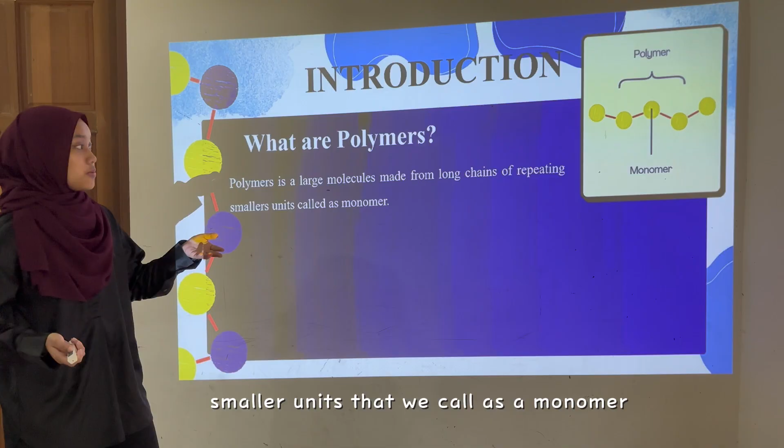So, what are polymers? Polymers is a large molecule that made from long chains of repeating smaller units that we call a monomer. So basically, the most common shape of polymers is made in pellets, which is a small plastic beads.

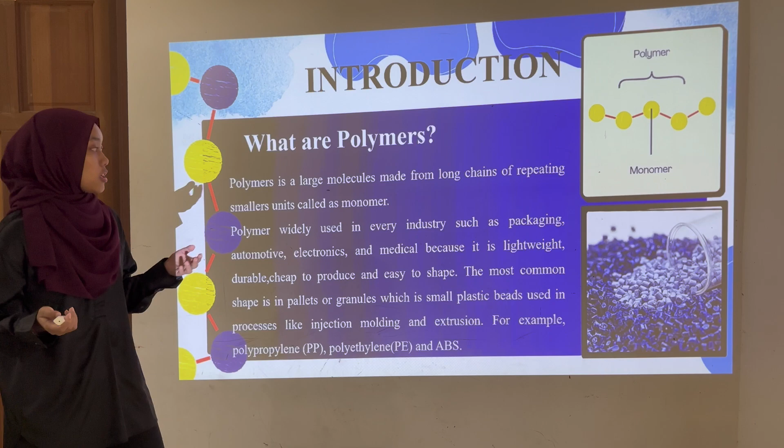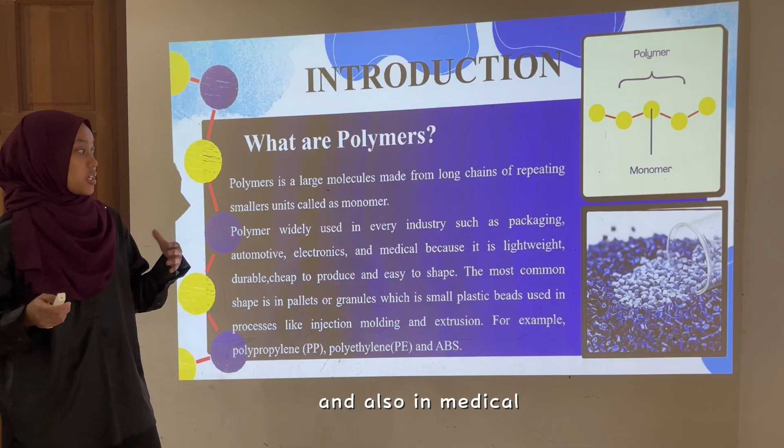Mostly we use these pellets in industry as packaging, also automotive, electronics, and also in medical because it's lightweight and durable, and also easy to shape.

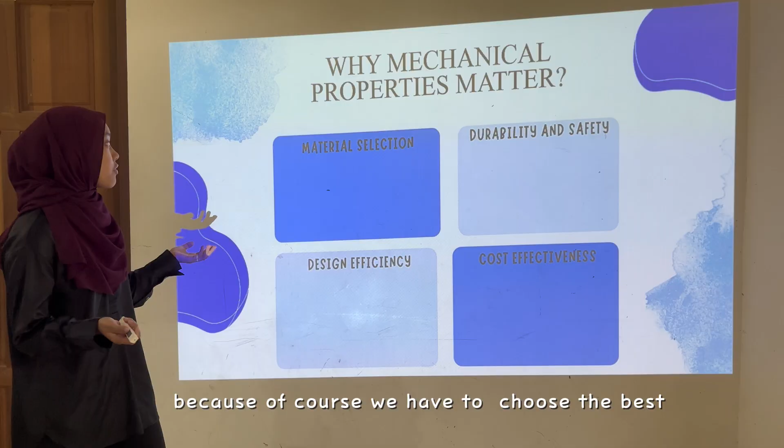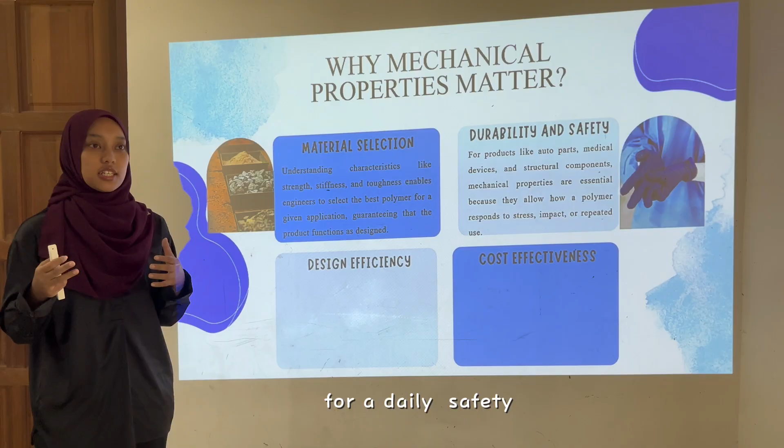So why does mechanical properties matter? Because of course we have to choose the best polymers before we produce our product or design. Next is durability and safety, for example medical devices that you can use repeatedly for daily safely.

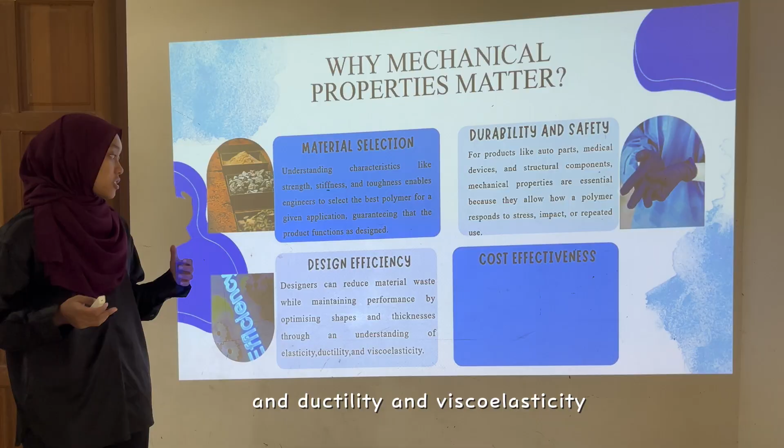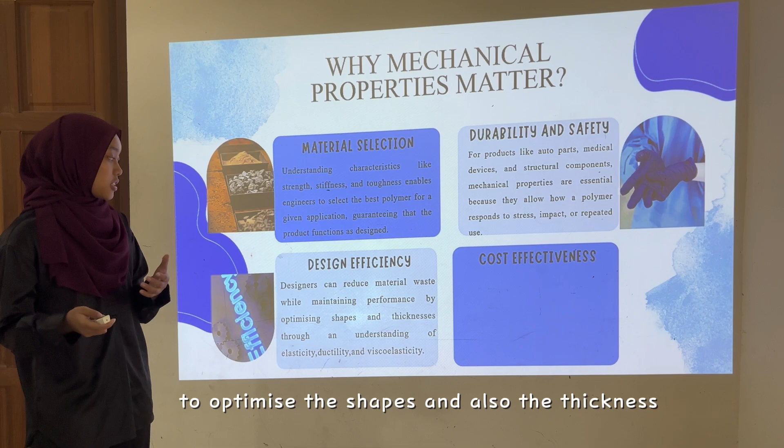Next is the design efficiency. Of course, we have to understand elasticity, ductility, and viscoelasticity before we produce the design, to optimize the shapes and also the thickness. And last is of course to avoid high maintenance, to save our money, to save costs.

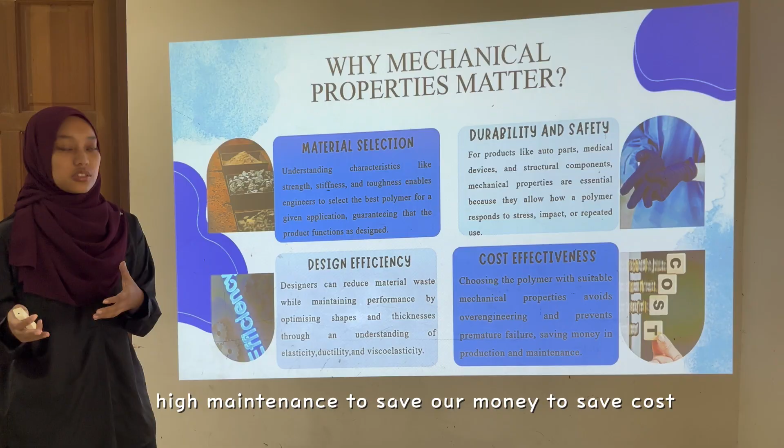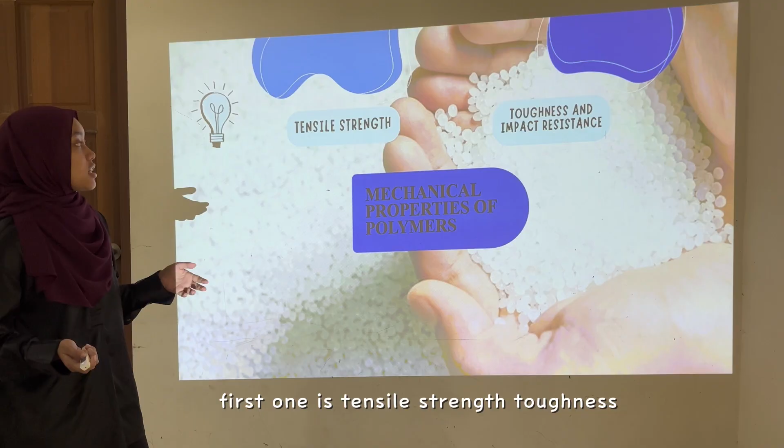So we have a set of mechanical properties of polymers. First one is tensile strength, toughness, impact resistance, elasticity and viscoelasticity, stiffness, hardness, and also creep behavior.

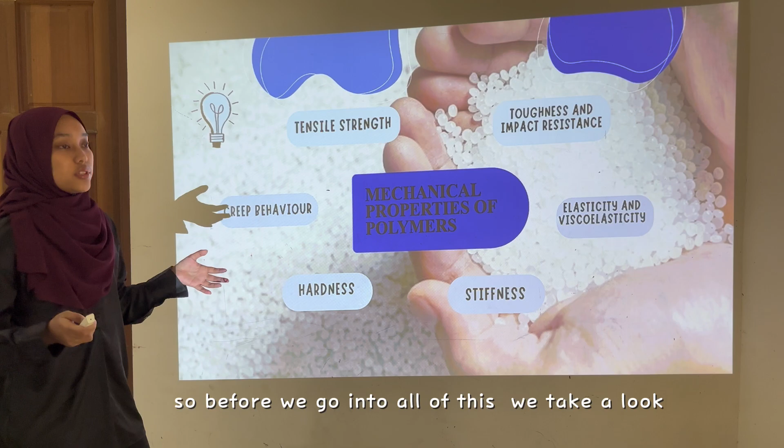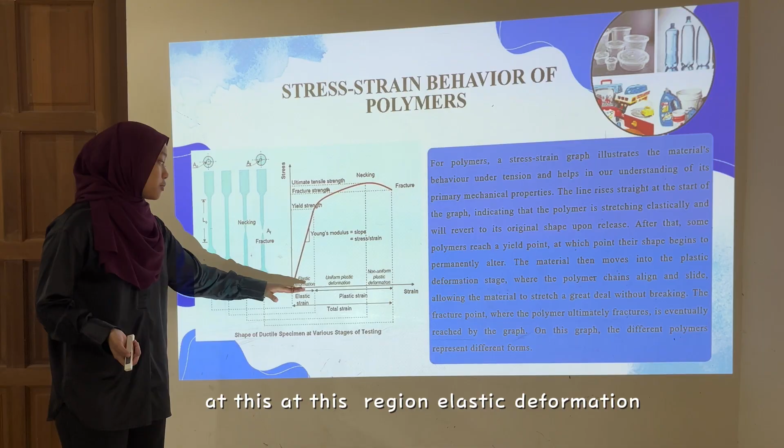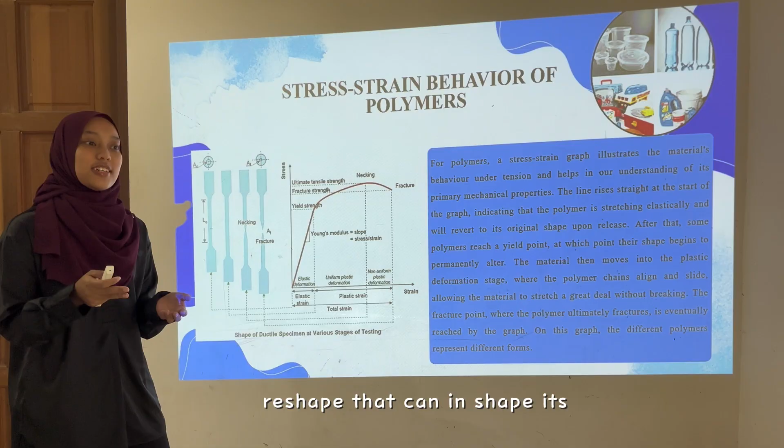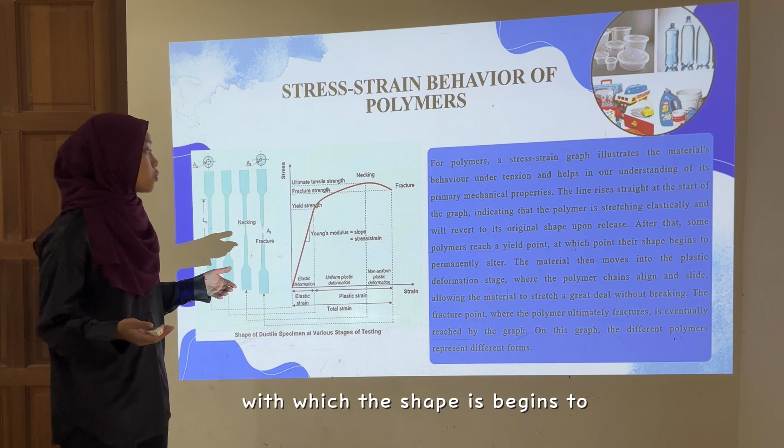So before we go into all of this, we take a look at a graph of stress strain first. In this region, elastic deformation, the polymers can reshape back to its original shape. At this yield point and yield strength, the shape begins to permanently alter, that it cannot be reshaped again, and that we call the plastic deformation region.

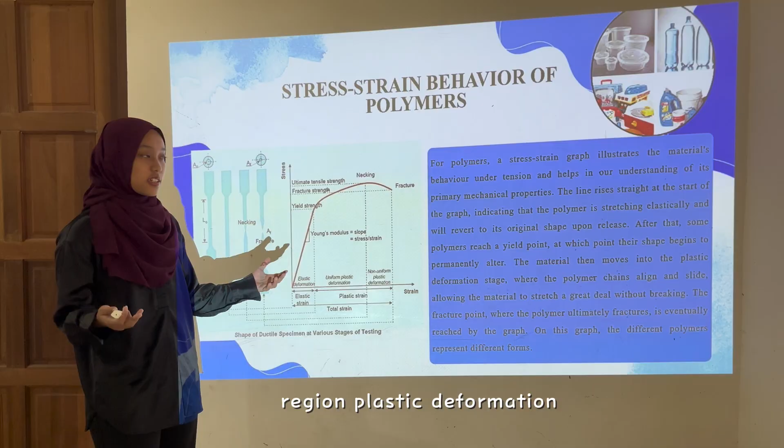And after that, it will break at a fracture point.

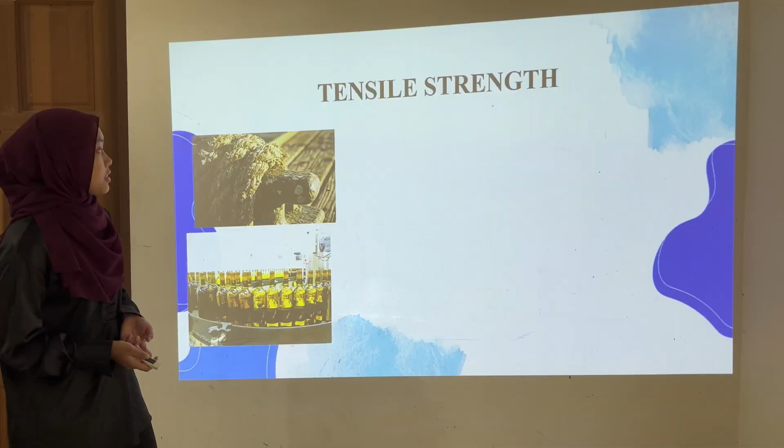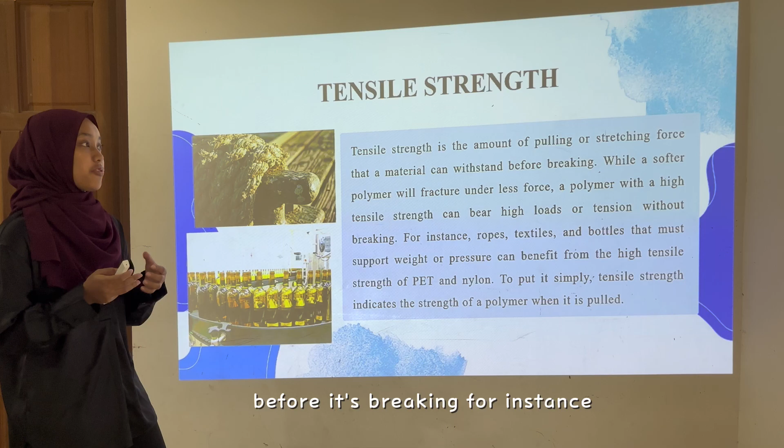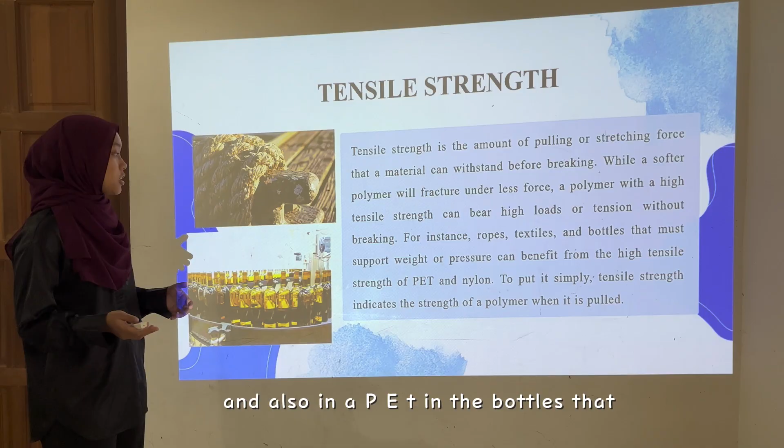So first one is tensile strength. Tensile strength is the maximum force that we're pulling before it's breaking. For instance, the ropes - we use nylon in the ropes to tie a boat. And also PET in the bottles, for how much weight we can support the liquids in the bottles.

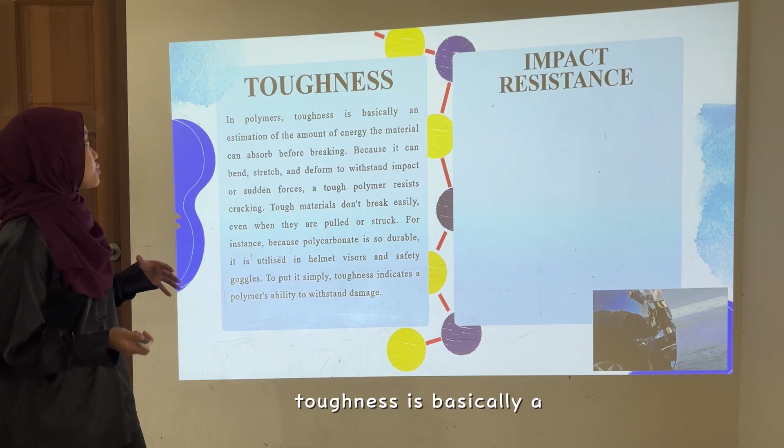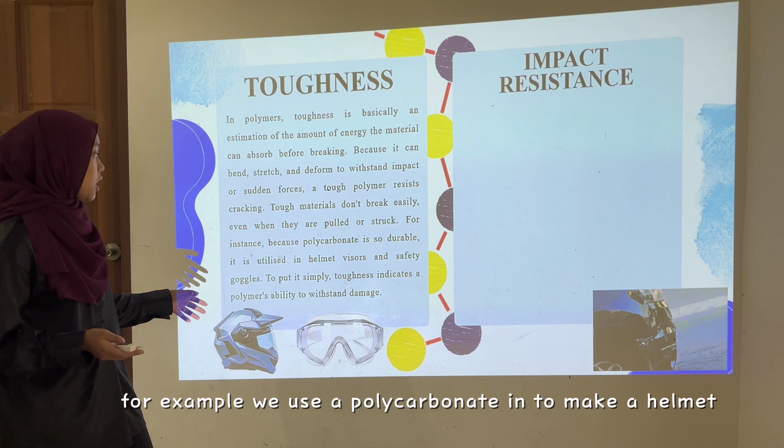Second one is toughness. Toughness is basically how much energy it can absorb before it's breaking. For example, we use polycarbonate to make a helmet visor and also safety goggles, because it's durable.

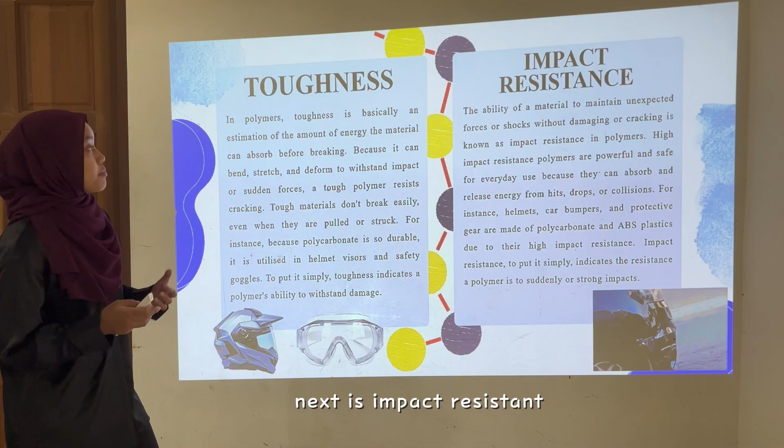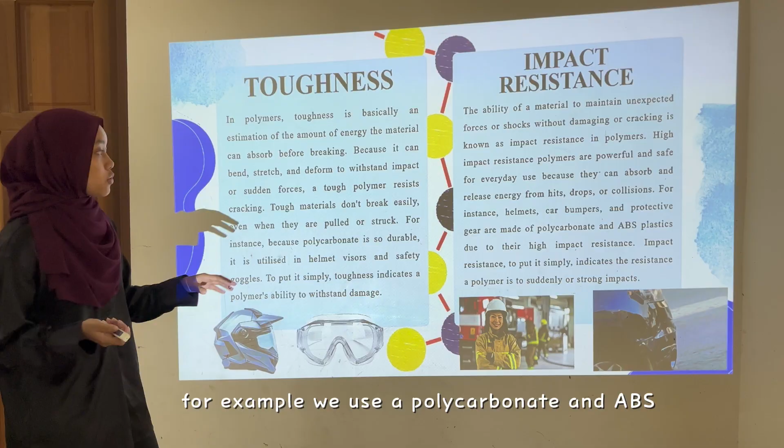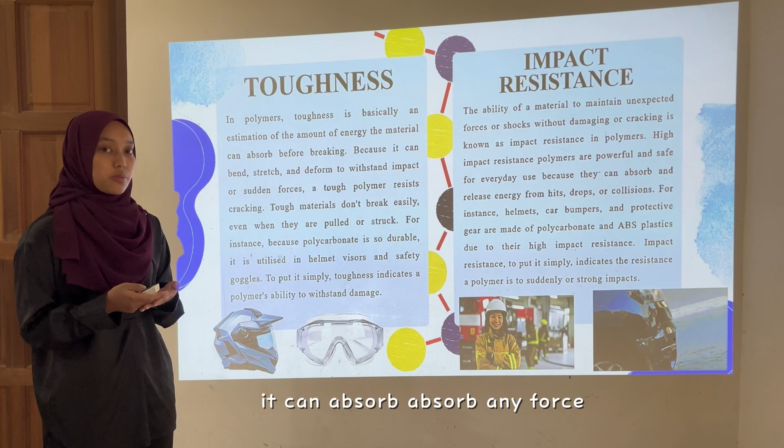Next is impact resistance. Impact resistance is the ability to absorb a force that suddenly falls. For example, we use polycarbonate and ABS plastic to make a helmet and also car bumpers because it can absorb any force and have a strong impact.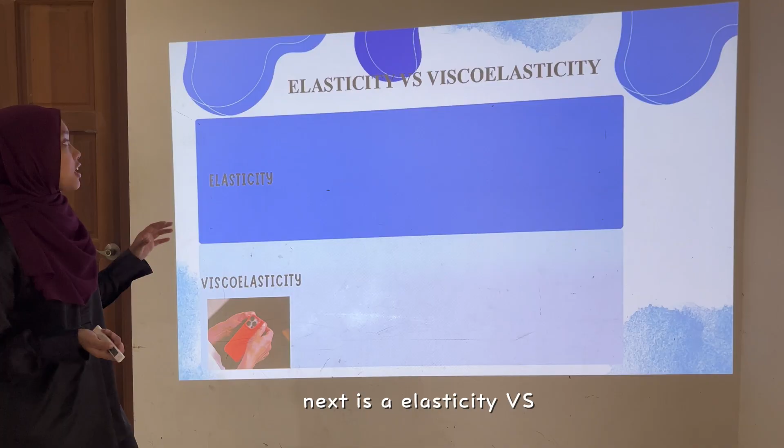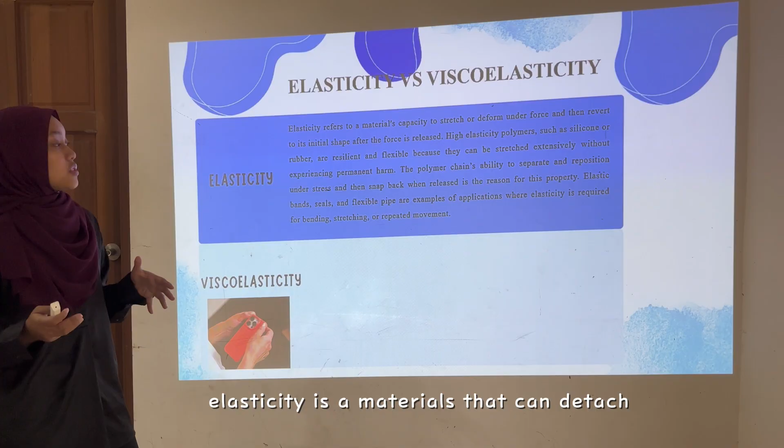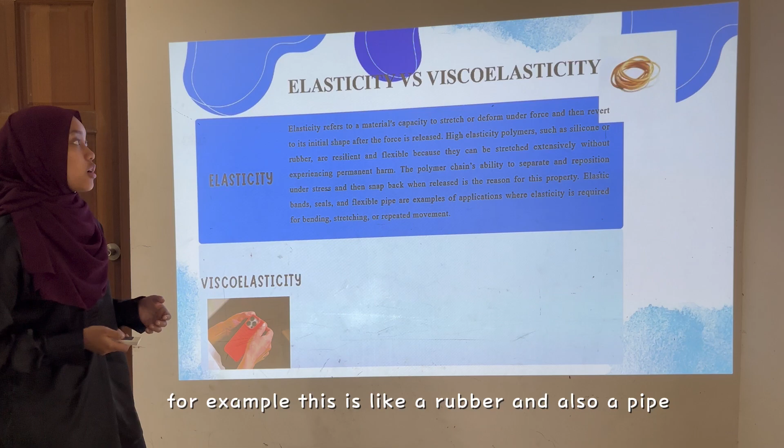Next is elasticity vs viscoelasticity. What is the difference? Elasticity is materials that can stretch or deform under force and revert to its initial shape. For example, this is like rubber and also a pipe.

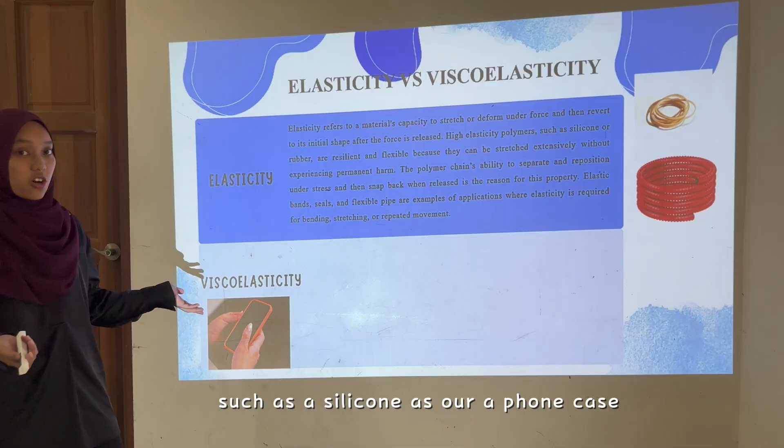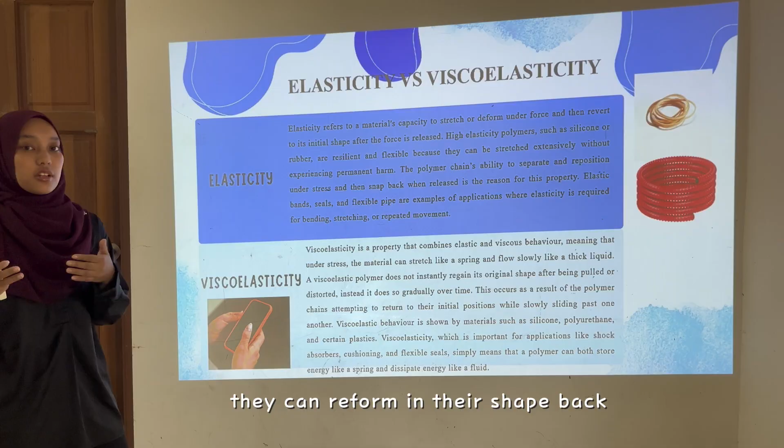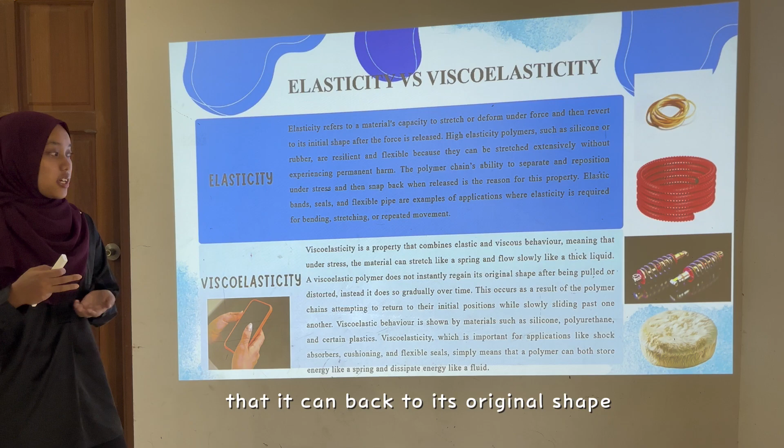So what is viscoelastic? Mostly we use it in our daily life, such as silicone as our phone case. Viscoelasticity means they can reform in their shape back, but it takes time. For example, like a shock absorber and also our cushion mattress, that it can go back to its original shape, but it takes time.

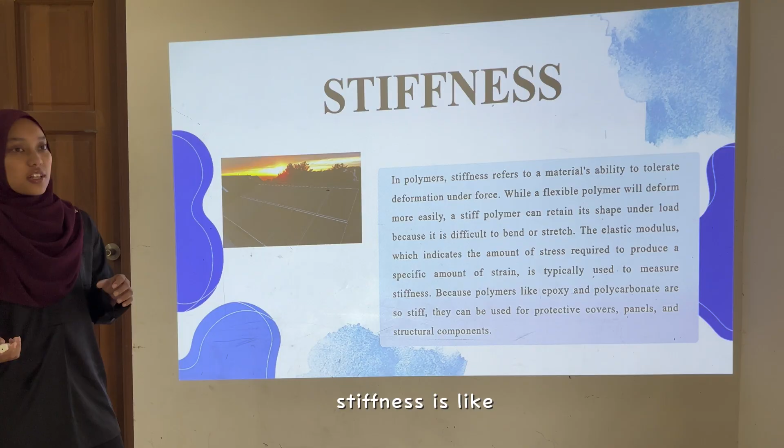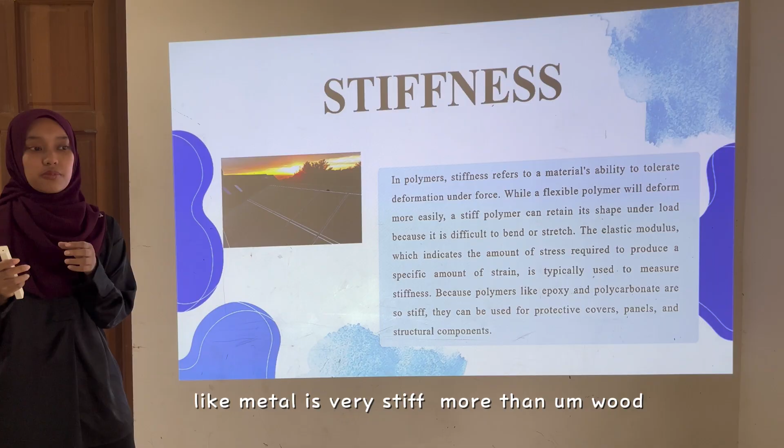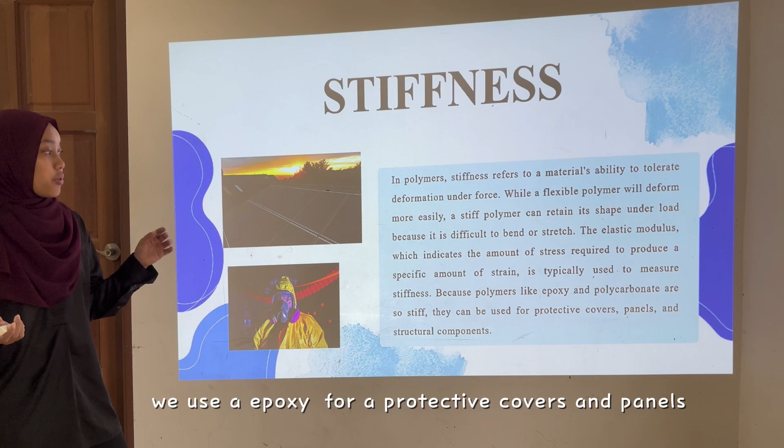Next is stiffness. So what is stiffness? It's like the difference between a metal and wood - metal is very stiff, more than wood. For example, we use epoxy for protective covers and panels.

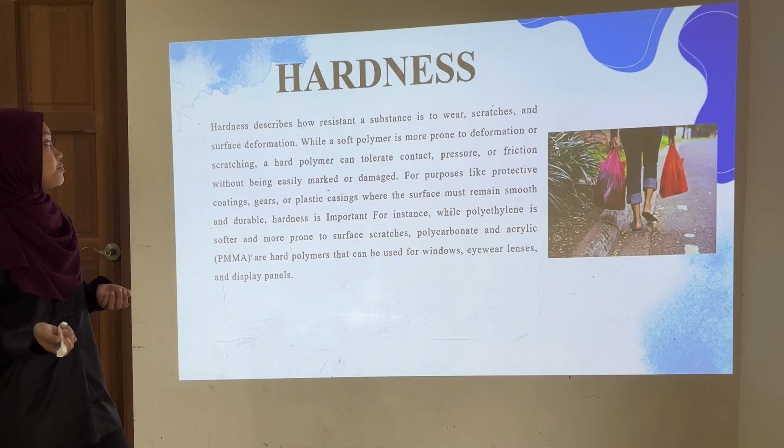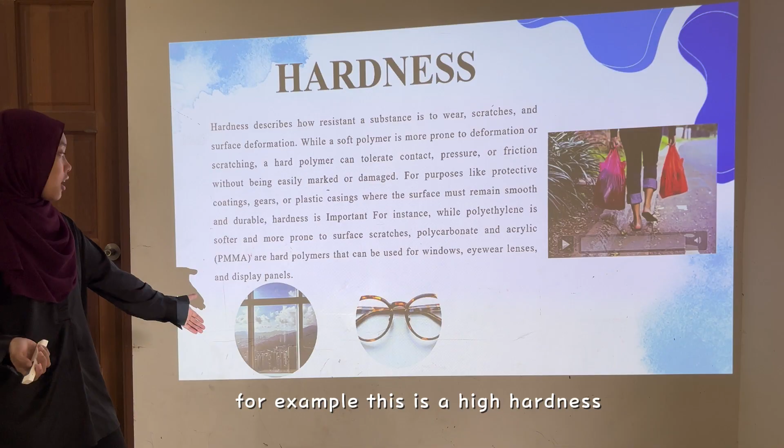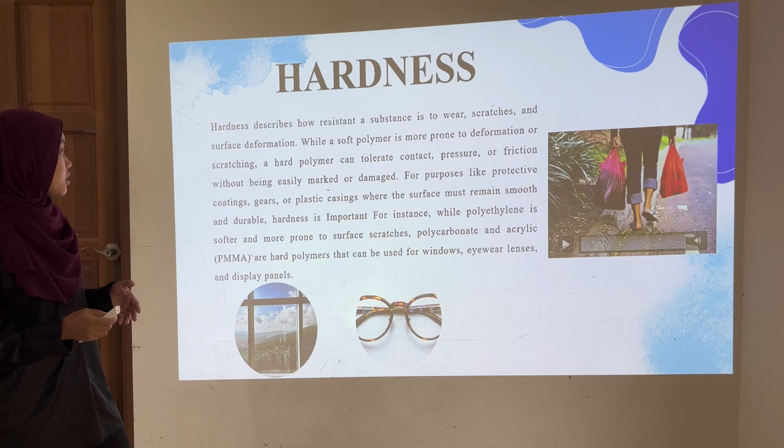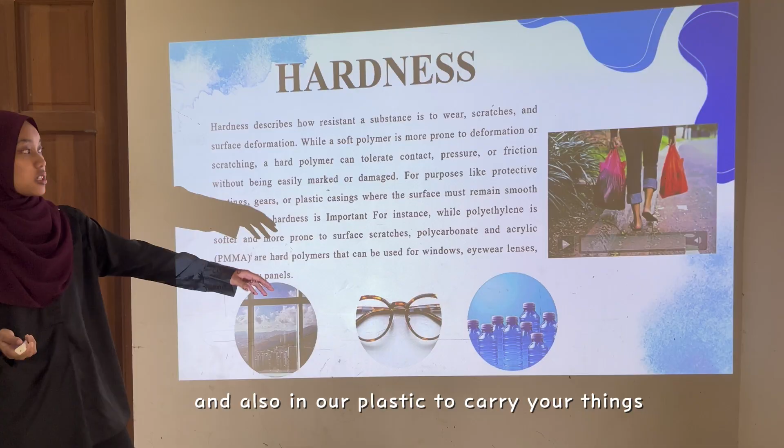So hardness. Hardness is the ability or resistance to wear, scratch, or surface deformation. For example, a high hardness polymer can prevent scratches - we use polycarbonate and acrylic to make windows and lenses. For soft polymer, we use it as bottles and also plastic to carry things.

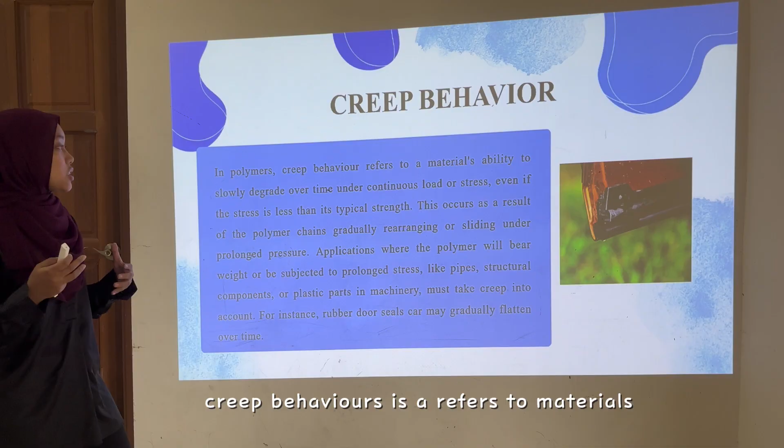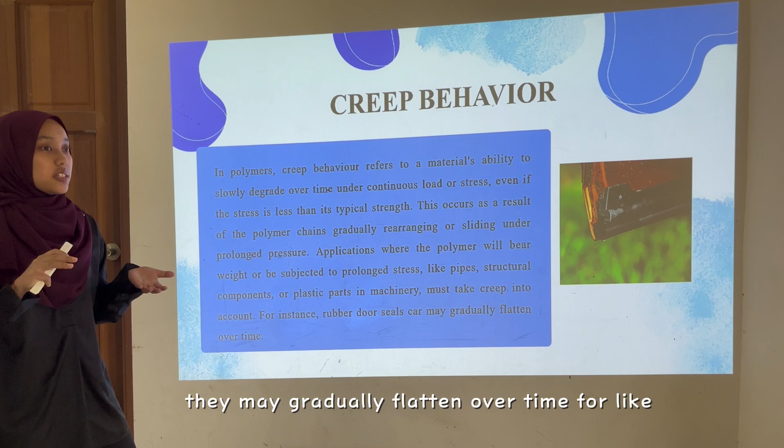And the last one is creep behavior. In polymers, creep behavior refers to materials' ability to slowly degrade over time. For example, a rubber door seal may gradually flatten over time - they will flatten, but over 1 year and 5 years above.

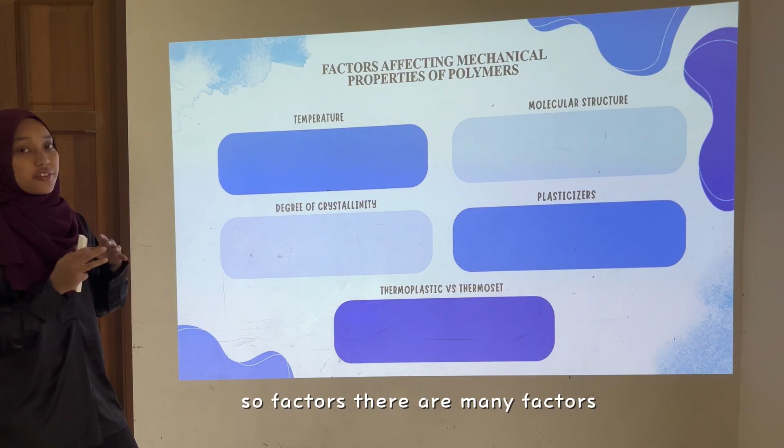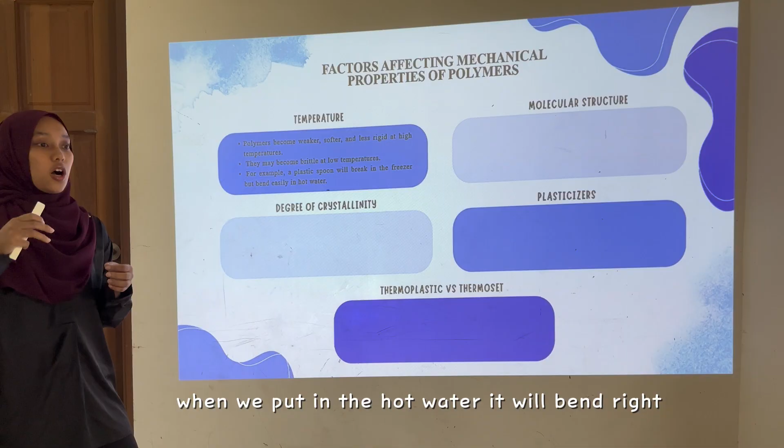So there are many factors affecting mechanical properties of polymers. First is temperature - for example, a plastic spoon. When we put it in hot water, it will bend, right? When we put it in the freezer, the spoon will break easily. This depends on the temperature.

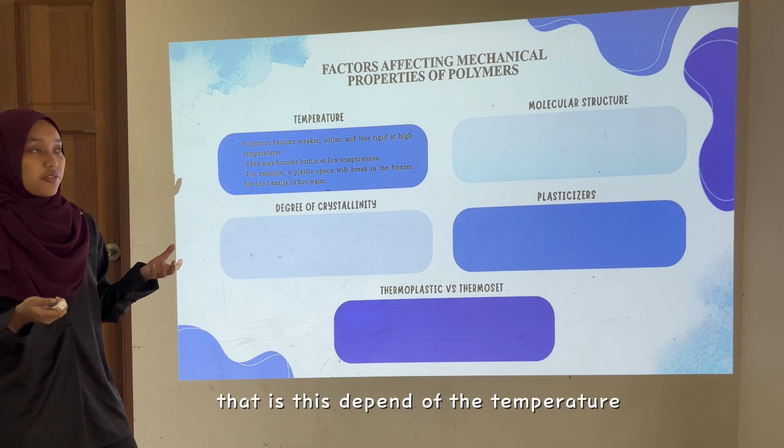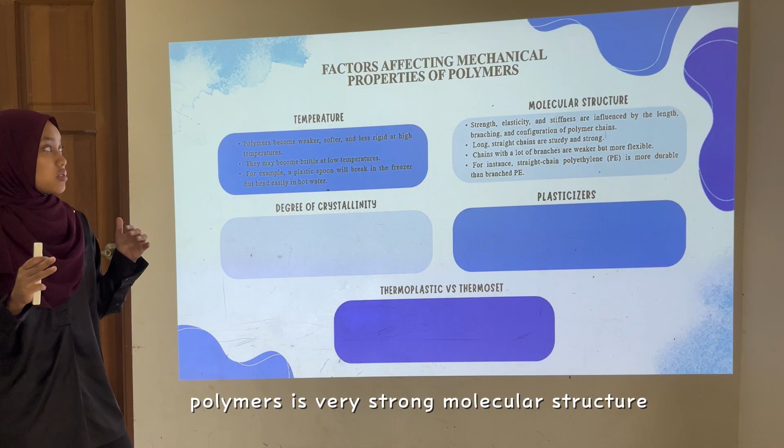So molecular structure - very long or straight chains of polymers have very strong molecular structure. For example, linear polyethylene is more durable than branched PE.

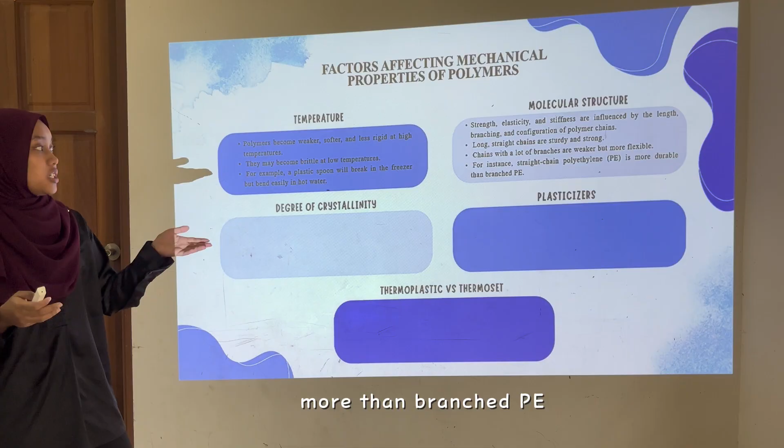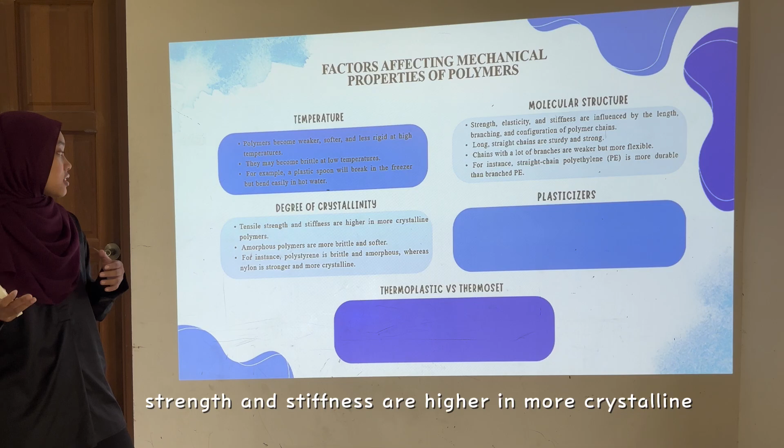Next is the degree of crystallinity. The tensile strength and stiffness are higher in more crystalline polymers. For example, polystyrene is very brittle, but nylon is very strong and more crystalline.

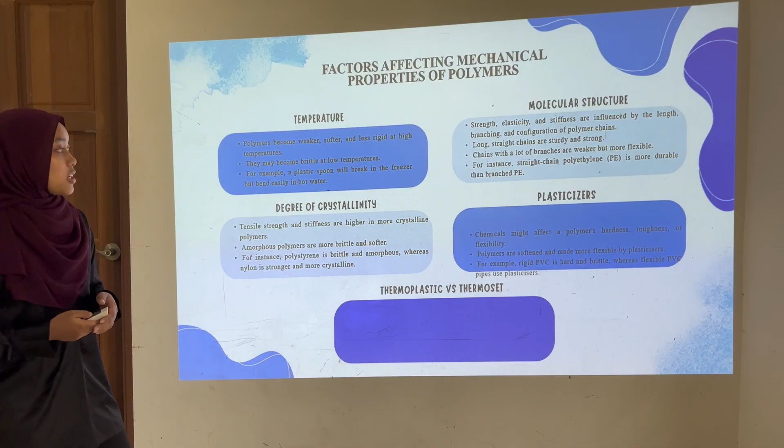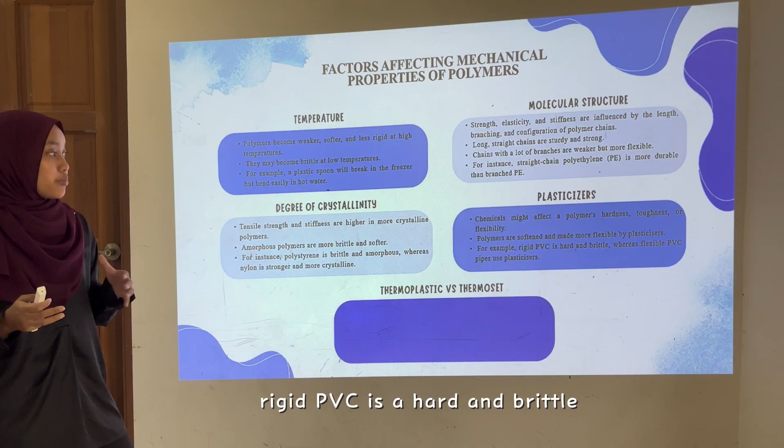Next is plasticizers. Chemicals might affect polymers' hardness, toughness, or flexibility. For example, rigid PVC is hard and brittle, whereas a flexible PVC pipe uses plasticizers.

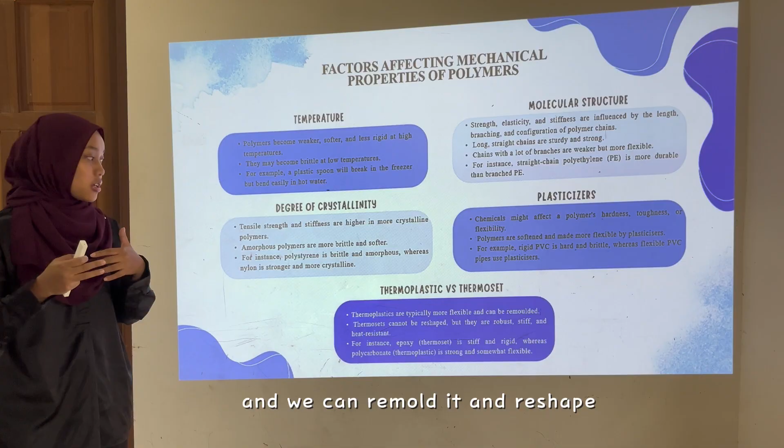Next is what is the difference between thermoplastic and thermoset? Thermoplastic is more flexible and we can remold and reshape it, while thermoset cannot be reshaped. They are robust, very stiff, and heat resistant.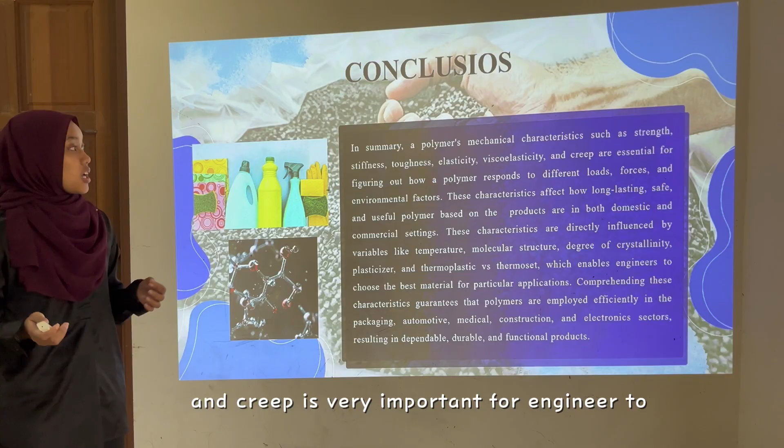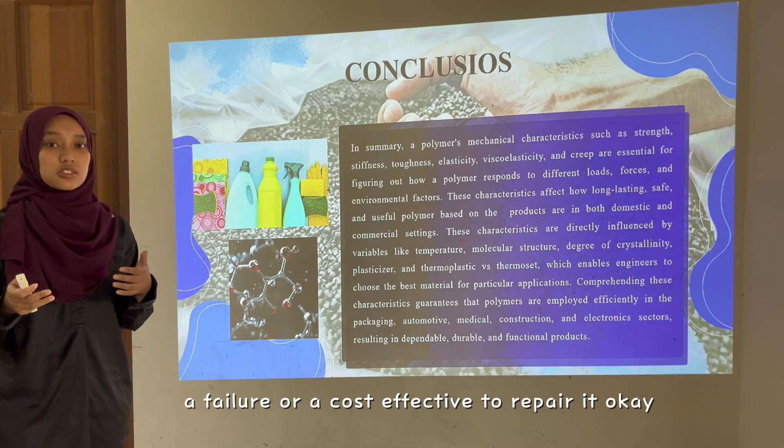So, in conclusion, the polymers' mechanical characteristics such as strength, stiffness, toughness, elasticity, viscoelasticity, and creep are very important for engineers to look at before we make a product or any construction, because it helps avoid failure or costly repairs.